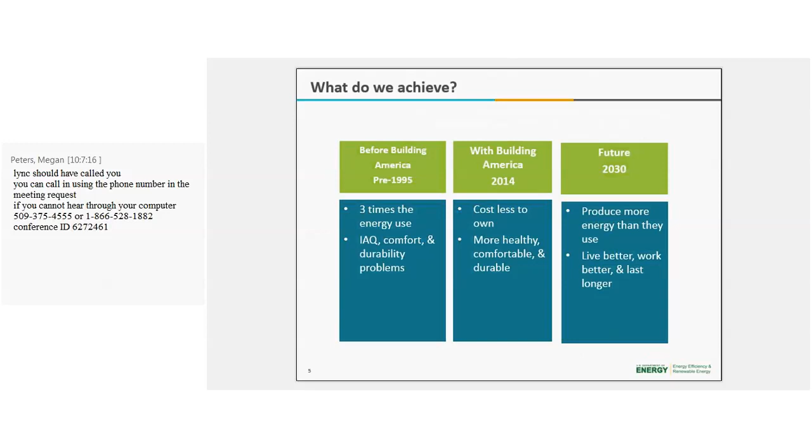So what does Building America achieve? In nearly 20 years of Building America research, we have spearheaded combining ultra-high efficiency and high performance, in both new and existing homes. We consistently are achieving these challenging tasks, and they're growing every year.

With that, we look at where we've been and where we're going. For example, in 1995, a home used about 3 times more energy per square foot compared to today, and indoor air quality, comfort, and durability problems were common back then. But today, a home built to DOE Zero Energy Ready Home specifications uses less than half that energy and is more comfortable, healthy, and durable.

By 2030, though, what do we hold for the future? Building America will demonstrate that new and existing homes can produce more energy than they use. That is the goal.

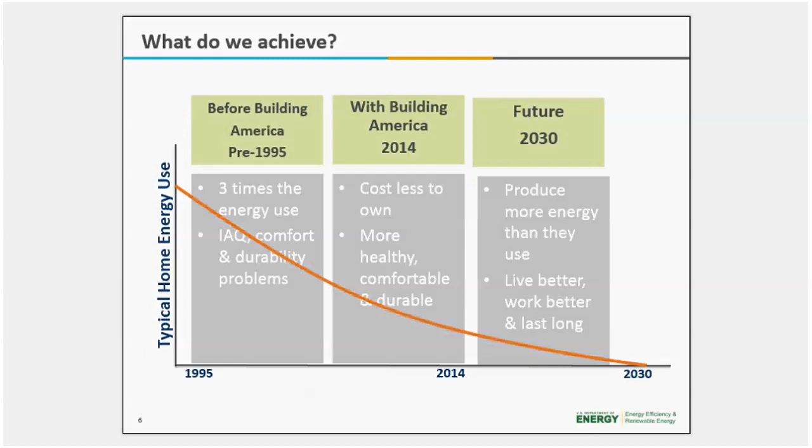So with window retrofit opportunities, it's probably not a mystery to anyone on the line that windows are a major source of heating losses. We know this, and the gains in the building can significantly drive up residential energy bills. Despite this fact, approximately 40% of U.S. homes still have single-pane windows, and these homes are inherently inefficient and poor insulators. We have several case studies that have shown this.

The presence of single-pane windows in homes has persisted over the past two decades. Despite the fact that approximately 30 million windows are replaced each year with higher-performing insulated windows, a large percentage of the double-pane windows are not higher-performing low-E windows, but are made of clear glass. So there is a tremendous opportunity here for technologies that improve existing windows' performance, such as low-E storm windows.

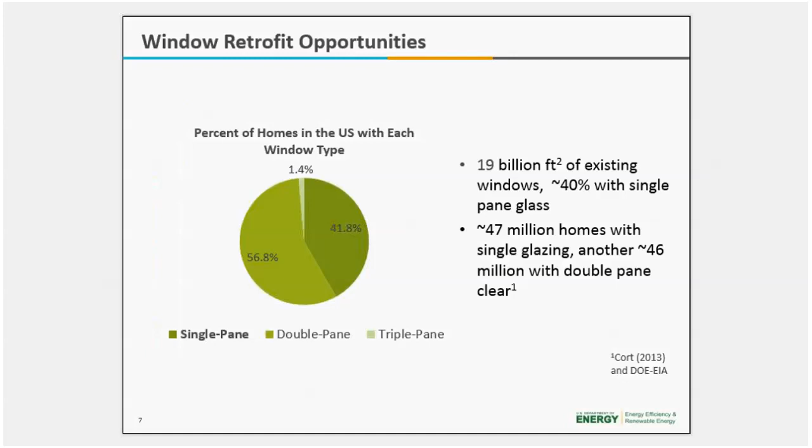These technologies can provide energy savings to a large segment of residences, most of which accommodate moderate and low-income households. So cost-effective window retrofits, that's always the big question: are they cost-effective? DOE has been supporting technology development, market assessments, and early deployment activities of low-E storm windows, which include a recent climate-based modeling effort to determine where and what types of low-E storm windows are cost-effective throughout the U.S. The results are pretty impressive.

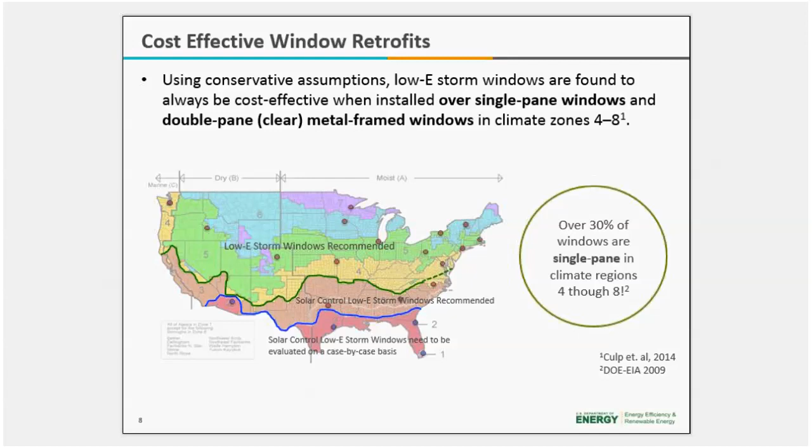So, a new look at low-E storms, inside and out. Considering the amount of energy lost through windows of existing homes each year, this is definitely a remodeling retrofit area, and there is a need for a solution. Although there are many good window replacement technologies available to homeowners, window replacement is simply not an option for many, for reasons including cost and affordability, as well as aesthetic reasons, for homeowners who want to preserve the historic look of the home.

One of the points we'd like to emphasize during this webinar is that storm windows have evolved through the years. A lot of people have an idea about what a storm window is, but these ideas may be dated, especially the look of them. Modern storm windows are not your grandmother's storm windows anymore, which had to be installed and removed every season, and cleaned almost monthly.

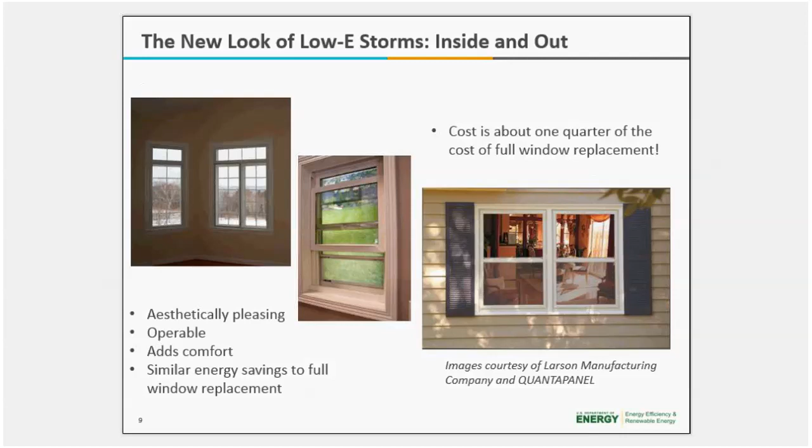Modern storm windows and interior panels are designed to blend in with the existing architecture, be permanently mounted, and are available as both fixed and operable windows. The photo on the left, the interior low-E panel, both fixed and operable, shows this. The photo on the right shows an operable exterior low-E storm, which also includes an insect screen.

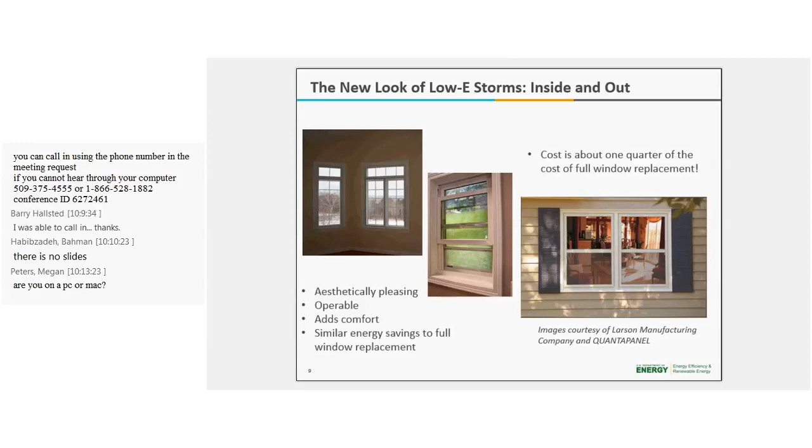Let me get into the actual presentation, and I'm going to introduce Tom Culp, who has been working with various programs in low-E storm windows for over 8 years now. He headed a DOE-funded research project from 2009 to 2013 to demonstrate, through residential and commercial case studies, the ability for low-E storm windows and retrofit panels to cost-effectively reduce energy costs in existing buildings. He's the owner of Birch Point Consulting, and he'll be providing an overview of the technology for today's webinar, how it was developed, how it works, and he'll tell us about the field tests, case studies, and other research deployment efforts related to low-E storms. So Tom, I'm going to let you take it away.

All right, thanks Pam. Hopefully you can hear me okay. So the technology in low-E storm windows has really been under development for almost 15 years now, and it initially started through the Emerging Technologies program at DOE.

DOE supported the national labs to do a lot of testing of the initial concept, starting with lab testing, going up to some demonstration field case studies, and I'll be talking about some of those areas. After this technology graduated from the Emerging Technologies program, it was passed to the Building America program for in-field testing and installation guidance development, and now multiple groups are working on market transformation to make the broader building, energy efficiency, and utility communities aware of the benefits and opportunity for this technology.

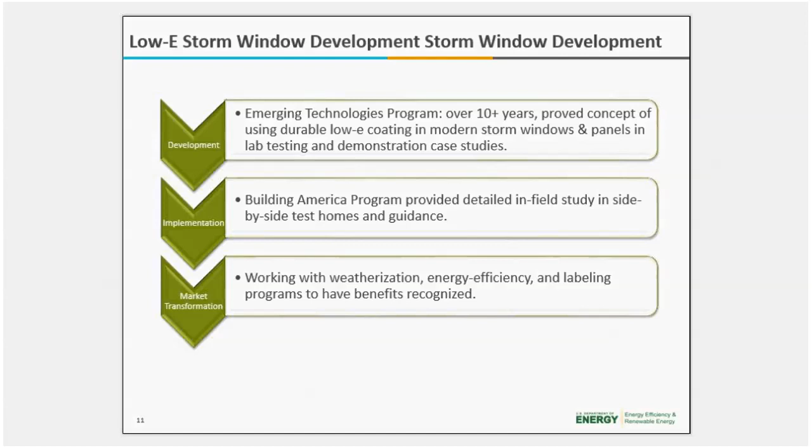But I'll start off talking about the initial concept behind low-E storm windows and some of the testing that has gone into its development.

Back in the 90s, Lawrence Berkeley National Lab, LBNL, first suggested this concept that a durable low-E glass coating, the kind you'd normally think about in a new window, could be incorporated into modern storm window designs to create a cost-effective insulating and sealing measure for existing windows. So you don't necessarily think of this as a separate window — think of it as a way, a measure, or a tool to improve your existing window.

Now, of course, if your existing window is degraded and needs replacement, you should replace it with the best window possible. But practically speaking, this is not an option for many home and building owners, either because of cost, historic preservation concerns, or because the existing window is fine and simply doesn't need to be replaced, but you still want to upgrade its performance. In that case, low-E storm windows and panels are an ideal choice to upgrade your existing windows at a much lower cost.

And it really does this in three different ways. First, it provides air sealing of the primary window. I'll talk about some case studies that show a 10% reduction in overall home air leakage when you add a storm window — not just the window itself, but the overall home — because particularly in many older existing homes, and especially with single-glazed windows, that's a primary leakage point. So addressing that area can have a significant impact.

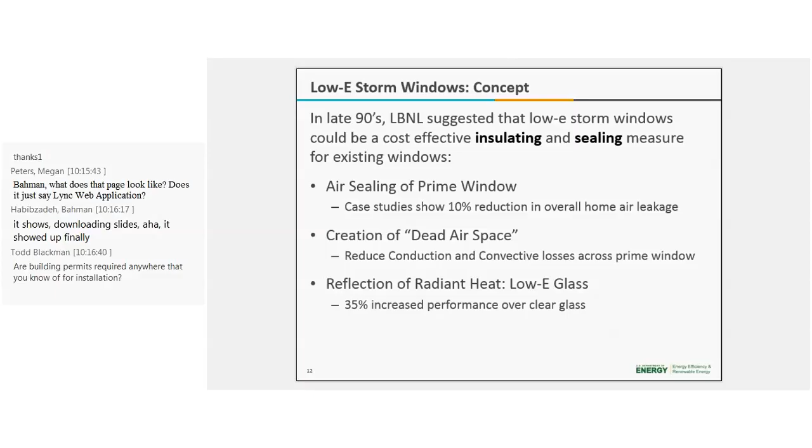Next, a low-E storm window creates a dead airspace that reduces conduction and convective heat losses across the primary window. Third, the low-E glass reflects radiant heat back into the home, reducing radiant heat loss, just as low-E glass outperforms regular glass in a new window.

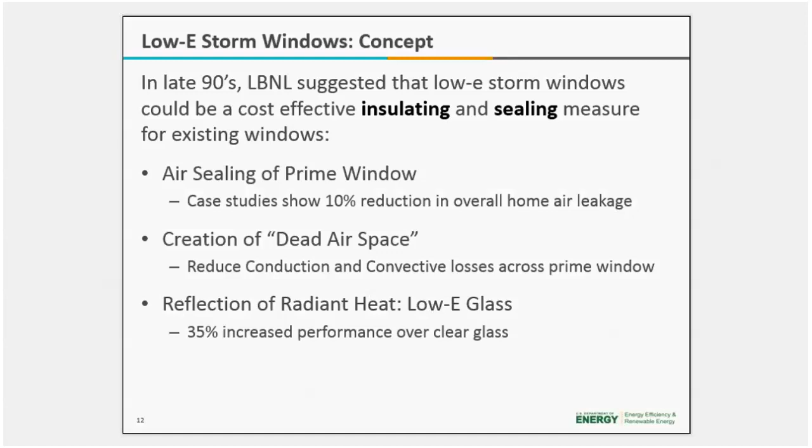The best way to see this concept is visually, through infrared field images. This particular image was taken in the wintertime from the outside of a home. Light colors show heat loss and dark colors show where it's more insulating. In the center you can see the bright, original single-pane window with considerable heat loss. On either side there are operable windows retrofitted with Low-E storm windows, and you can see side by side how the Low-E storm window significantly reduces the heat loss through that window.

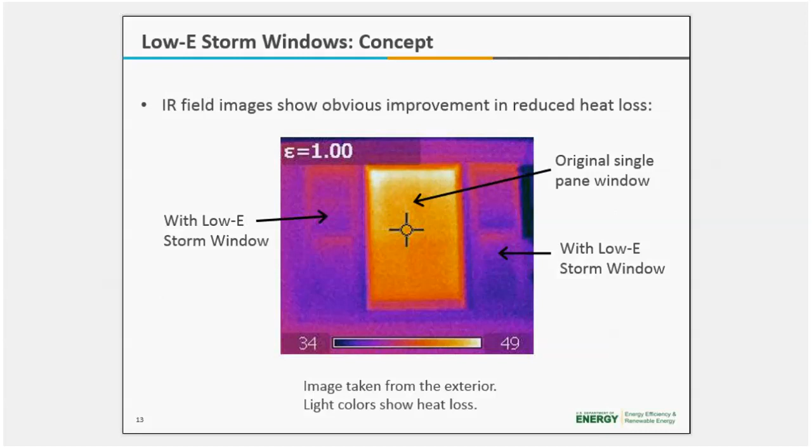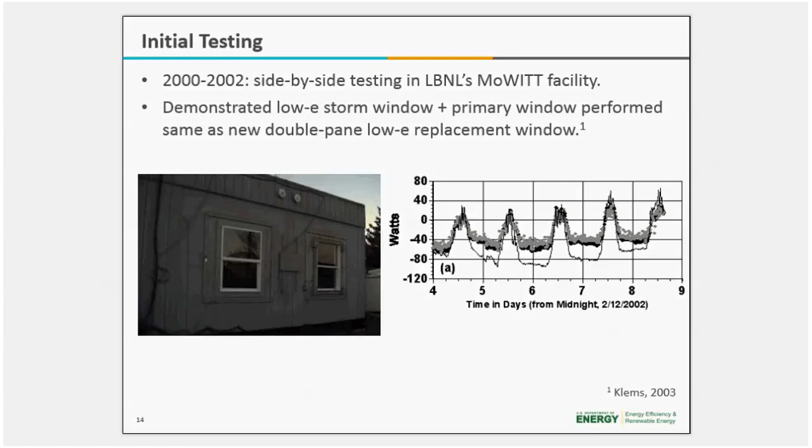To test the concepts, going through a bit of history: first, between 2000 and 2002, Lawrence Berkeley National Lab used their mobile window test facility, or MOWITT facility, to do side-by-side detailed testing of different window options. There's a lot more in this study from Joe Klems that you can look up, but basically they demonstrated that a Low-E storm window plus a single-pane primary window performed essentially the same as a new double-pane Low-E replacement window.

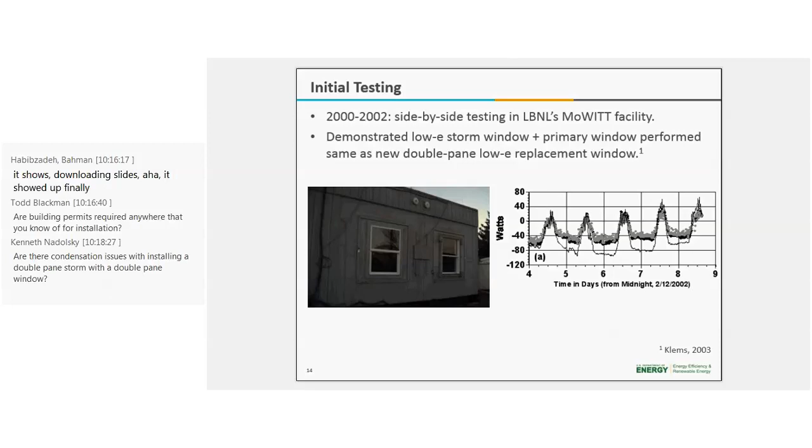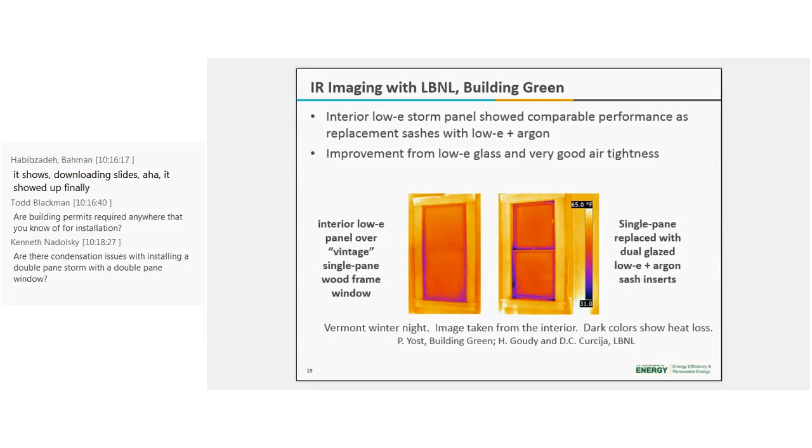Additionally, a bit later on, LBNL did some work with Building Green, Peter Yost's group up in Vermont, doing infrared imaging. This slide shows, on a Vermont winter night, an image taken from the interior. In this case the dark colors show heat loss and the bright colors show more insulating performance. On the left you can see an interior Low-E panel over a vintage single-pane wood frame window, and on the right the single-pane sashes were replaced with dual-glazed Low-E argon sash inserts. Visually, you can see they perform similarly in terms of heat loss.

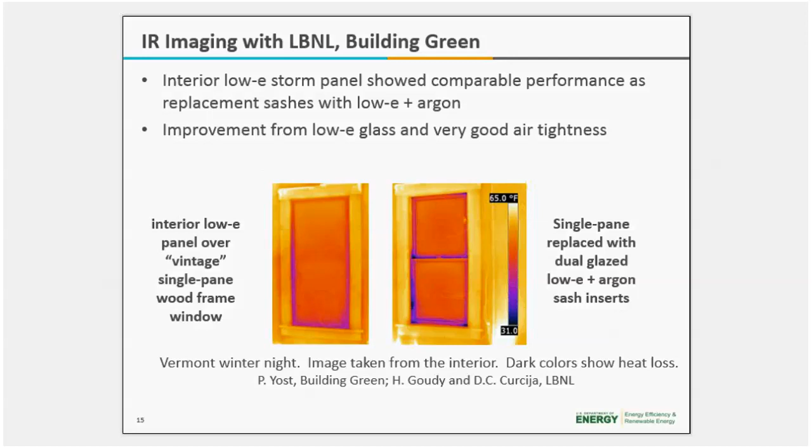So the concept, both in lab testing, looks quite positive — we can get significant improvement in performance by using both interior and exterior panels.

DOE wanted to take the next step and see how this works in the real world through field studies. So between 2003 and 2006, a field study was done in the Chicago area, co-funded by DOE and HUD, with the primary researcher being NAHB Research Center — now called Home Innovation Research Labs. They monitored six weatherization homes in the Chicago area that had single glazing and were retrofitted with Low-E exterior storm windows. This study showed the heating load was reduced by 21%, with a simple payback period of approximately 4.5 years for the Low-E storm windows.

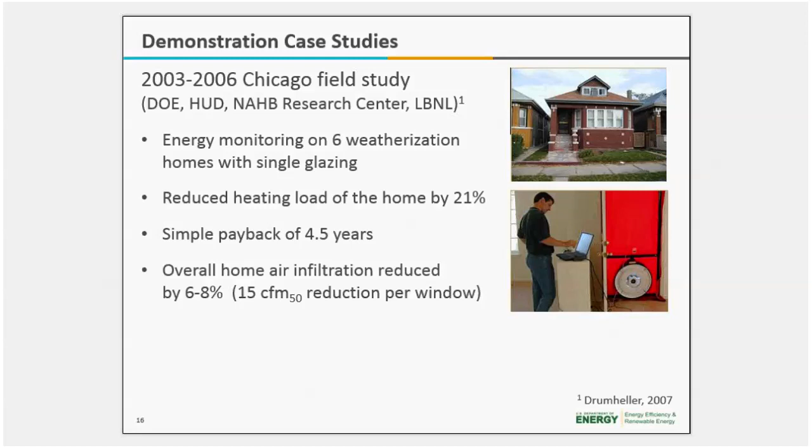Of course, for replacement windows, the payback period is considerably longer than that. Additionally, blower door tests showed the overall home air leakage was reduced by about 7%. That's for the overall home, not just the window, so that's actually fairly significant.

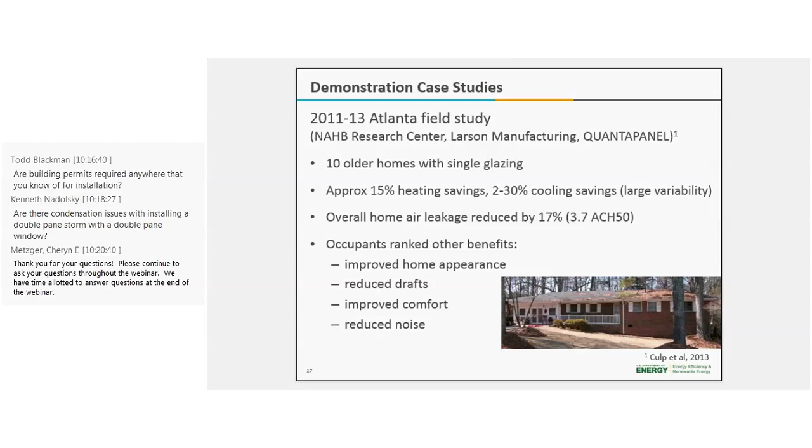Chicago is obviously a very cold climate, so we wanted to do a similar study in a more mixed climate. I participated in a DOE-funded study between 2011 and 2013, again with the NAHB Research Center, as well as Larson Manufacturing and QUANTAPANEL, where we took 10 older homes in the Atlanta area with single glazing and tested different storm window technologies. The Low-E storm windows showed, over a two-year period, approximately 15% heating savings and 2 to 30% cooling savings. There's large variability, particularly on the cooling side, because these are real-life field studies with variation between homes, the amount of trees around them, and real people living in them. These are occupied homes, so there's a lot of variability, but the results were very positive overall, both on heating and cooling.

A bit later on, Sarah Widder from PNNL will talk about test studies done in the PNNL test homes, which are a more controlled environment.

On the air leakage standpoint, these homes and their single-pane windows were particularly leaky, so by adding the storm windows we were able to reduce the overall home air leakage by 17% just by introducing these modern-style Low-E storm windows. In addition to energy efficiency, we also polled occupants on other benefits, and they actually ranked these higher than energy efficiency, because they're what you notice when you live in the home. The number one benefit cited was improved home appearance.

As Pam was saying, these are not your grandmother's old storm windows that have to be taken off seasonally, old and clunky. These are designed to be aesthetically pleasing, fit in with the architecture, and improve the curb appeal, dressing up these old existing windows. Additionally, reduced drafts, improved comfort sitting near the windows, and reduced noise were significant benefits cited by the occupants.

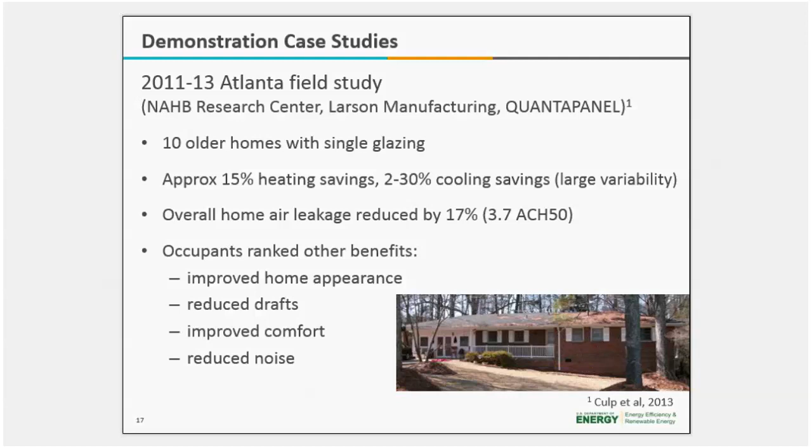In addition to single-family homes, we also wanted to test out low-E storm windows in multifamily buildings. As part of this same research study with NAHB Research Center, Quantapanel, and Larson Manufacturing, we took two older, 50-year-old large apartment buildings in the Philadelphia area. Just one of the two buildings is shown here. They're both identical, 101 apartments overall.

These had single-pane metal windows that already had old clear storm windows. But the old clear storm windows were really poor quality, so we replaced them with new modern low-E storm windows. Just by replacing those, we saw over a year period 18 to 22% reduced heating energy use, as well as 9% reduced cooling energy use, so very significant.

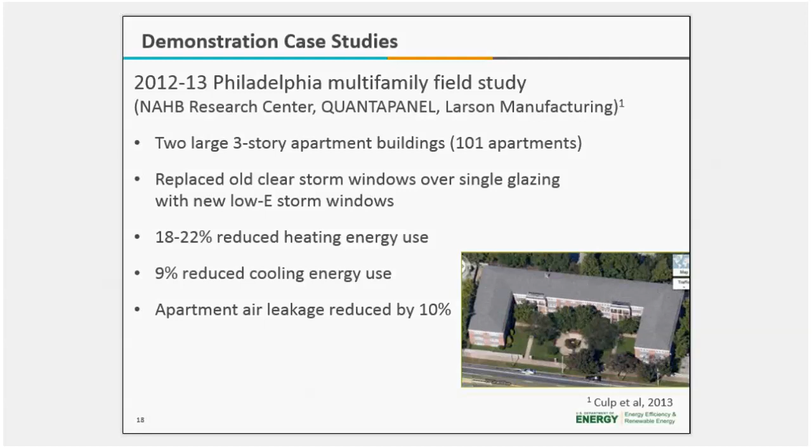We also did air leakage testing on select apartments and showed that the apartment air leakage was reduced by 10%, which is consistent with the other studies. So very positive results in both single-family homes and apartment buildings.

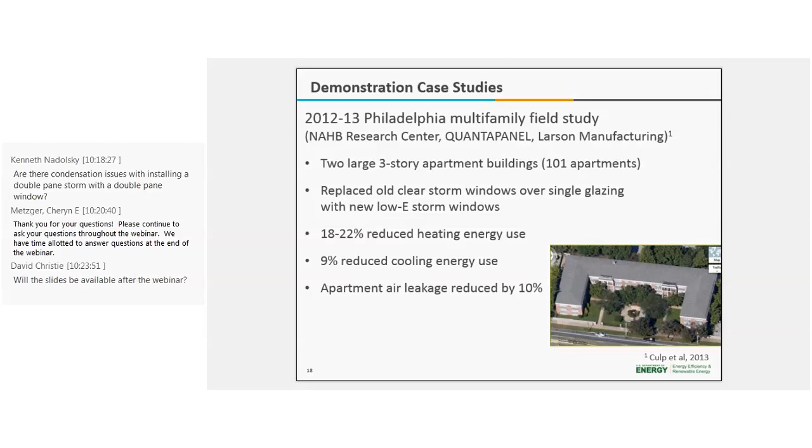I did want to mention, though, that low-E storm windows and panels are not just for low-income weatherization homes. Obviously, that's one of the first targets, but they're really appropriate and a good window retrofit option in almost any building type where it's either impractical or too expensive or undesirable to replace the existing windows. Of course, if you're going to replace the windows, put in as good of a window as you can, but in many cases it's just not practical or cost-effective to do so. In that case, low-E storm windows are a very good option.

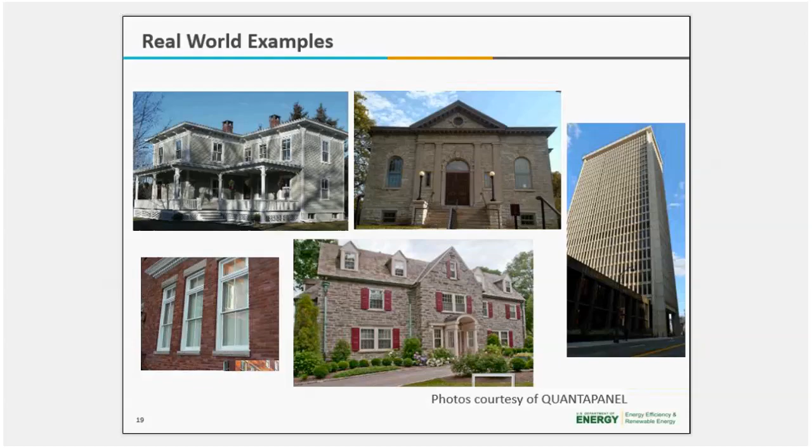As shown here on this slide, this includes homes of all types, historic buildings, light commercial buildings, and even large buildings. All the pictures here show real-life examples where either low-E exterior or low-E interior panels are being used.

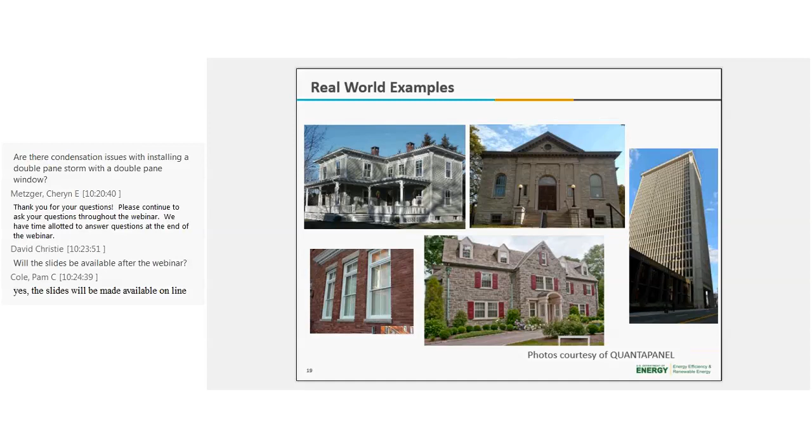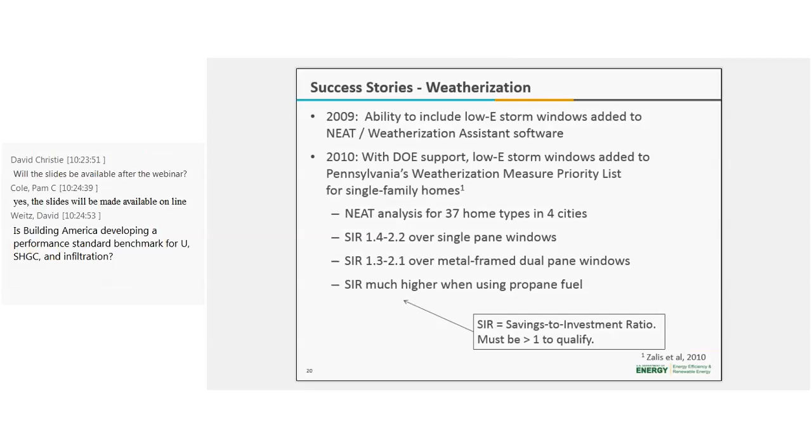Although they're really applicable to almost any building type, of course one of the first targets when we started to look at this is weatherization, both official government weatherization programs, but also the general weatherization market for upgrading existing homes. So back in 2009, the ability to include low-E storm windows was added to NEAT, the National Energy Audit Tool, a weatherization assistance software used by many state weatherization programs.

The following year, with DOE support, low-E storm windows were added to Pennsylvania's weatherization measure priority list for single-family homes. This was the result of a NEAT analysis for 37 home types, covering all different home types in 4 different cities across Pennsylvania to cover the different subclimate zones.

In this case, the key output we're looking at is the SIR, or savings to investment ratio. Under weatherization programs, the SIR must be greater than 1 to qualify for that program. When we did the NEAT analysis, the SIR was between 1.4 to 2.2 for low-E storm windows over single-pane windows, and it ranged from 1.3 to 2.1 over metal frame dual pane windows.

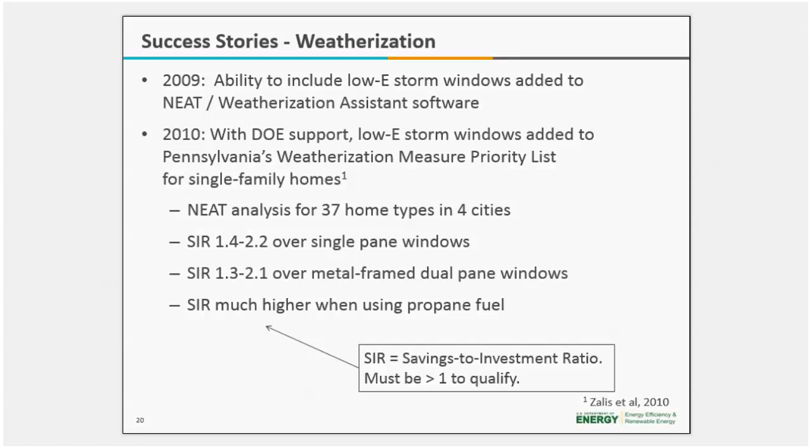The main study was done for natural gas heated homes, but when you use either propane fuel or electrical resistance heating, the SIR was much higher than this even. So in all cases, it was proven to be cost effective for the weatherization program in Pennsylvania, and they added it to their weatherization measure priority list.

So we wanted to, together with PNNL, expand upon what was done in Pennsylvania, to do a similar type analysis but for the entire country. We expanded this NEAT analysis using 39 different home types in 22 cities across all 8 climate zones that cover the continental U.S. There's a lot that went into this study.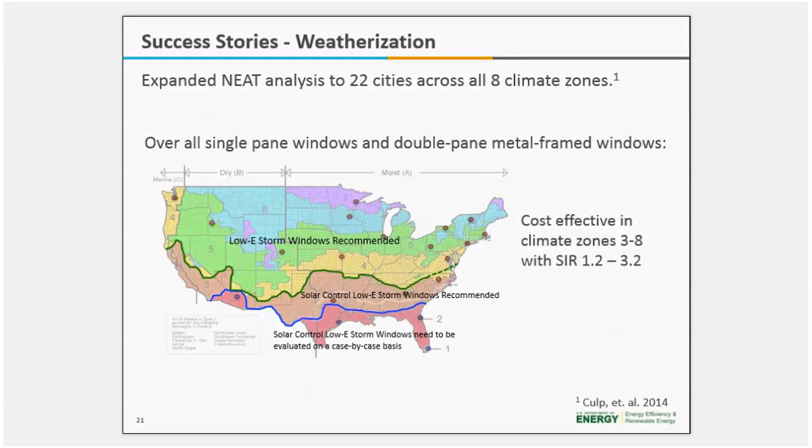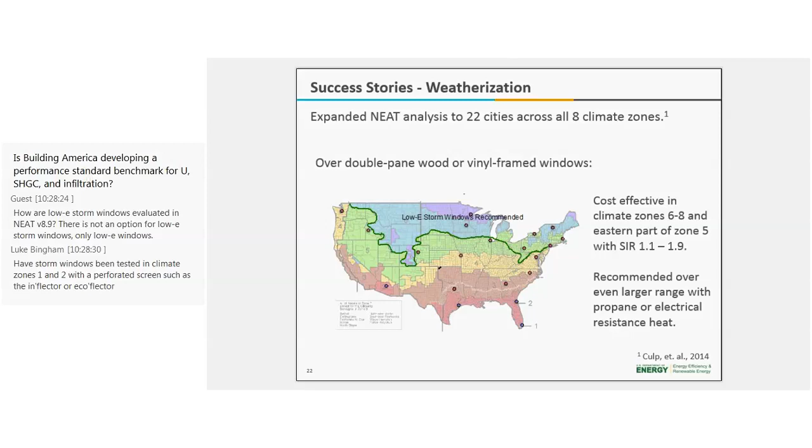We also tested double pane wood or vinyl frame windows, where adding a low-E storm window or panel would turn it into a triple low-E unit. This was shown to be cost effective in climate zones 6 through 8, as well as the eastern part of zone 5, which has higher heating fuel costs, such as Pennsylvania and New York. In this case, the savings to investment ratio, or SIR, ranged from 1.1 to 1.9. This was for natural gas heating; with propane or electrical resistance heating, they're recommended over a much larger range because those are higher cost fuels.

Taking these positive results from field studies and climate-based modeling, one group we're working with now is the Consortium for Energy Efficiency, or CEE, which includes utilities and energy efficiency program administrators. They've formed a Windows working group between CEE members and industry stakeholders to advance the uptake of efficient fenestration products across the U.S. and Canada, including efficient new and replacement windows as well as window attachments such as low-E storm windows. One of the first outcomes was the CEE window product overviews published in February, a resource for CEE members and program managers detailing options and technologies for addressing windows in utility or energy saving programs.

There are currently a couple of working groups, including a Windows attachment subgroup covering low-E storm windows. Our next meeting will be in Salt Lake City as part of their industry partnership meetings, September 17th and 18th.

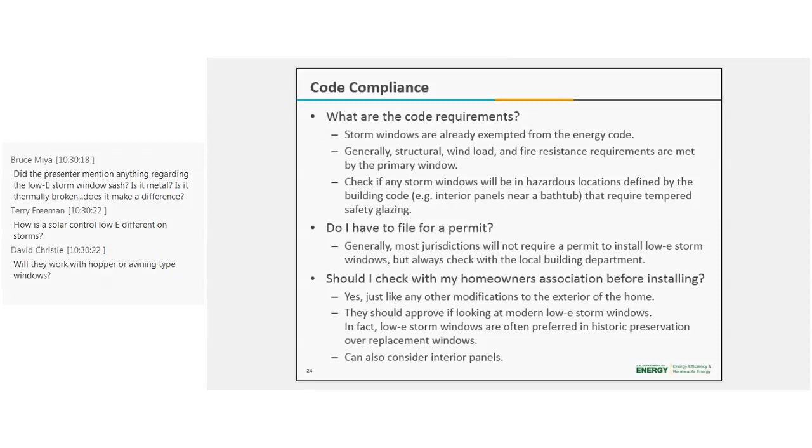We wanted to add a slide about code compliance and questions we get about how code requirements apply to low-E storm windows and panels. For the energy code, storm windows are already specifically exempted because you're improving the energy performance of what's already there, and the code recognizes that. As for other building code requirements, such as structural, wind load, and fire resistance requirements, those are generally met by the primary window and building facade, so it's generally not a concern as long as the storm window or panel isn't adversely impacting that performance.

The main thing to watch for when using low-E storm windows or panels is whether they'll be used in a hazardous location as defined by the building code—for instance, an interior panel installed near a bathtub or swimming pool. Those scenarios require tempered safety glazing, which is easily done; you just need to specify tempered glass for that application.

The next question we get a lot is whether you need to file for a permit. That comes down to the local jurisdiction. Our experience is that installing these panels and storm windows can be a do-it-yourself project for a homeowner, or you can have a contractor do it. Because of that, most jurisdictions generally do not require a permit to install low-E storm windows, but you always need to check with your local building department—it's really a local issue you need to check.

A third question is whether you should check with your homeowners association before installing low-E storm windows, and the answer is yes. Just like any other modification to the exterior of the home, whether installing a mailbox or painting your house, you need to check if your neighborhood or HOA has any covenants. In general, they should approve it since modern low-E storm windows are very aesthetically pleasing and designed to fit the architecture of the building. In fact, they're often preferred in historic preservation programs for preserving appearance. But if it is a concern, you can also consider interior low-E panels.

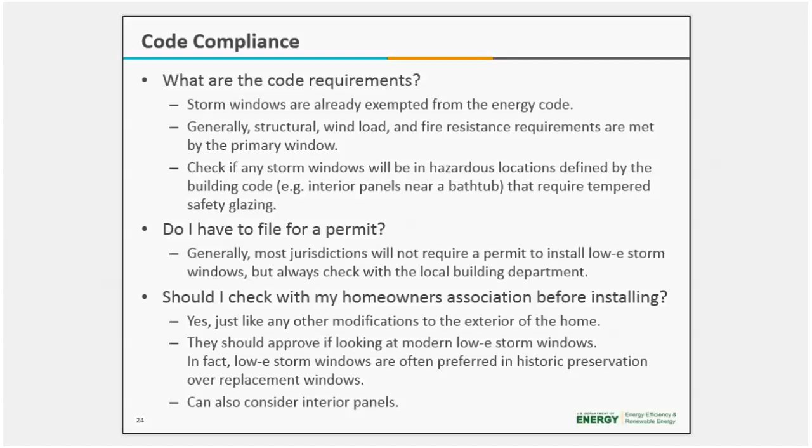So a couple of last items looking to the future before I hand it off to Sarah. Some of the other activities going forward.

Recently, low-e storm windows were integrated into the FEDS model, which then supports their use in most federal building energy audits. DOE is supporting the development of a new organization and certification and rating program for window attachments, and that work will cover a wide range of products, including storm windows.

As I mentioned, we're working with CEE to develop tools and resources for energy efficiency incentive programs, and we're also working directly with utility and weatherization programs to provide technical assistance.

Contact Katherine Cort, who's kind of the lead on this for PNNL, or you can contact myself and Sarah Widder, and there are other people on the call. I know Carrie Haglund has been working with a group up in Minnesota, also called CEE, but a different group. There's a lot of work out there.

Contact one of us for a lot more details. So next, I'll hand it over to Sarah Widder.

Sarah is an engineer at Pacific Northwest National Laboratory, and she's an expert who has worked in a wide range of areas related to energy efficiency of homes and buildings — not just windows, but all components of housing and the Building America program. In particular, she's an expert on the side-by-side test homes at PNNL, and today she'll be talking about some of the results there with low-e storm windows.

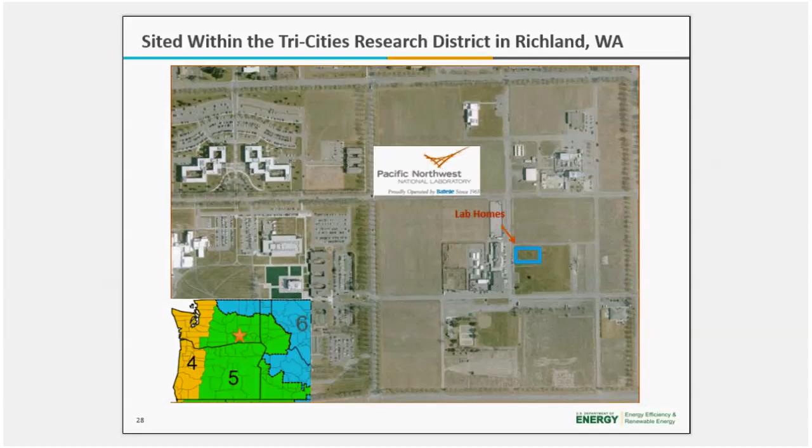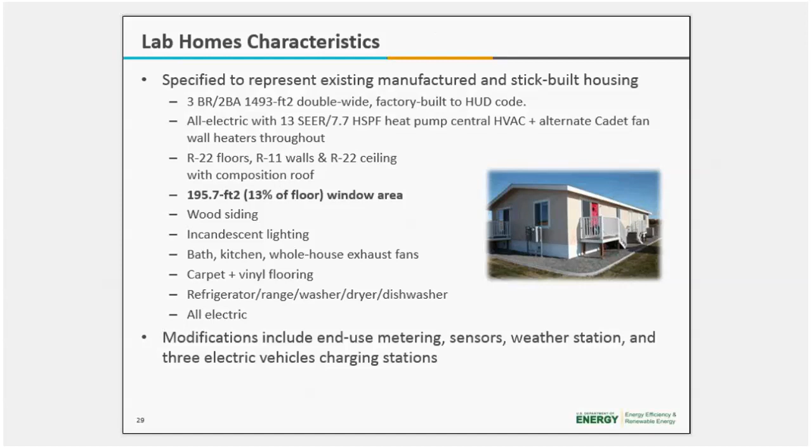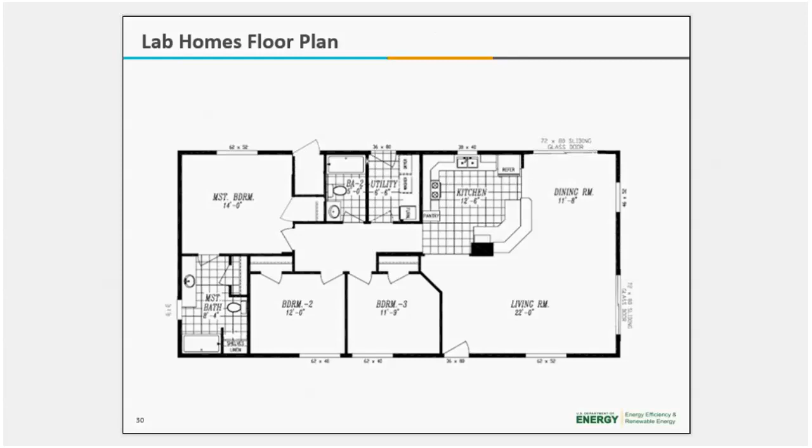These homes are also highly monitored and controlled, and that's what gives us such a precise measurement at the end of these experiments that we do.

We have commercial lighting panels as the circuit panels in the homes, so we have 42 individually monitored breakers, so we can measure uniquely almost every load in the home. And half of them are controllable, which is how we simulate occupancy in the home. We turn on and off lighting, we turn on and off some of the appliances, and generate sensible loads within the home that are representative of people and equipment, so that we have identical occupancy patterns that are representative of a typical occupant in both the homes.

And I know that there's a lot of variability in occupancy patterns, and we could have an entire webinar about that, but the really nice thing about the way the homes are laid out is as long as we do it identically in both the homes, it sort of becomes a null factor. So it's not as important that we get the occupancy itself exactly correct, as long as it's identical in both the homes.

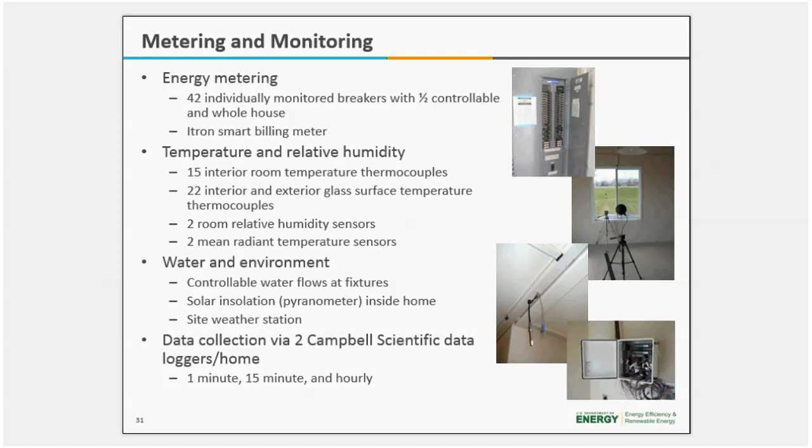And then we also have interior and exterior surface glass temperature measurements so we can look at conduction through the glass. We take all our data with Campbell Scientific Data Loggers. We typically do our analysis with the 1-minute data, but we collect it on a couple different intervals.

So I've talked a little bit about how the lab homes are unique. The main thing that makes this platform unique is that it has a built-in control. So we have one home that has baseline windows — in this case, we'll talk about that later — a clear glass, aluminum frame, double pane windows, and then another home that is identical in every way except for the one technology we're trying to evaluate. That allows us to precisely look at the impacts associated with that technology, and gets us a lot more causal answer than you can get in field studies.

But that's dependent on how identical the homes are. We're assuming that these homes are operating the same. And so when the homes were first sited, we did an initial building construction comparison to verify similar performance, and the homes operated pretty much as similar as you could expect, and actually a lot more similar than you would get with site-built, stick-built housing, because they were manufactured homes.

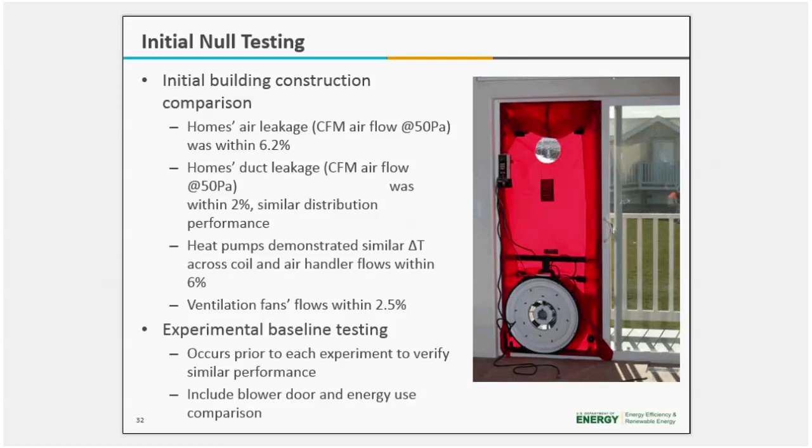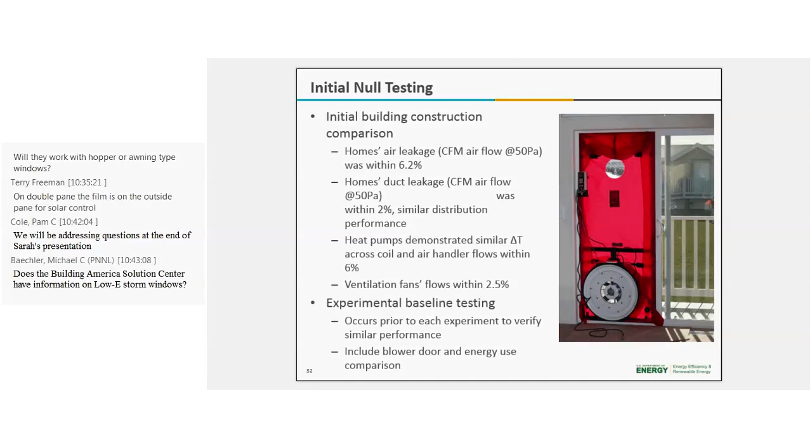And then before each experiment, we also do an active baseline, or a null test, where before the technology is retrofit, we operate both homes for about a week with full occupancy and HVAC control, just to ensure similar energy performance before we do the retrofit. And then anything we see that varies from that baseline performance, we can attribute to the retrofitted technology.

So let's get into the experiment now. Here's a description of the window characteristics.

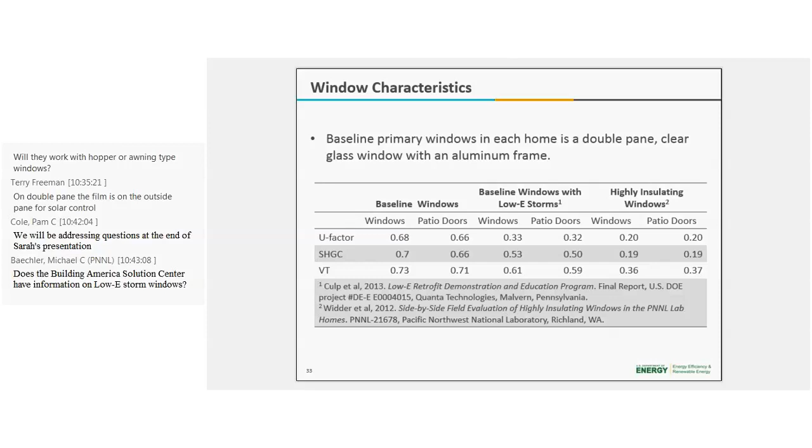The baseline windows I described were a double pane clear glass window with aluminum frame, which we have a lot of in the Pacific Northwest region for these unretrofit 60s, 70s era ranch homes.

You can see the U factor, which is a measure of thermal resistance, the solar heat gain coefficient, which is a measure of how much solar heat will come through the window and get into the house, which is beneficial in the heating season, not so great in the cooling season. And then the visible transmittance, VT, is how easy it is to see through the glass.

So you can see we had a significant reduction in U factor and solar heat gain coefficient with the low E storm windows. I'll mention that these numbers for the low E storm windows, 0.33 and 0.53, and the patio doors as well, were generated via modeling done by a company using LBNL's Window Therm model. They are created in accordance with NFRC testing techniques, but there's not official NFRC certified ratings available for low E storm windows right now, which is one of the barriers to really getting these technologies incentivized in the market - we don't have a clear way to describe their performance in comparison to other window fenestration products.

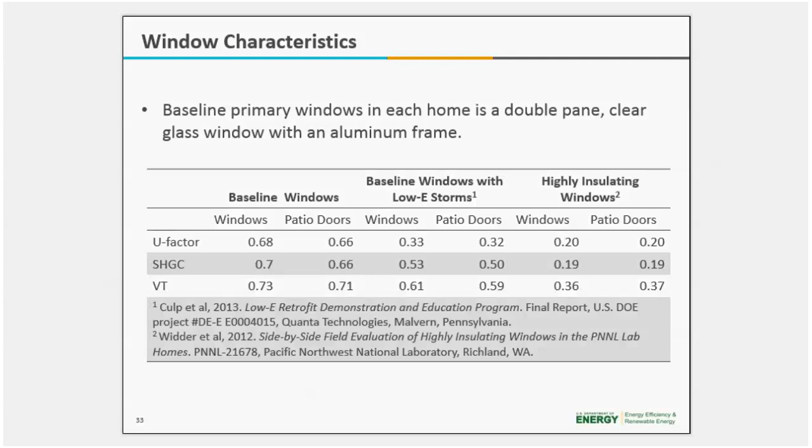So I'm not going to spend that much time on this slide. Tom covered in great detail how low E storm windows save energy. This is just 3 visual depictions of it. Just like a double pane window, they're creating an additional dead air gap that will decrease conduction. It'll also reflect heat back into the space and can decrease air leakage.

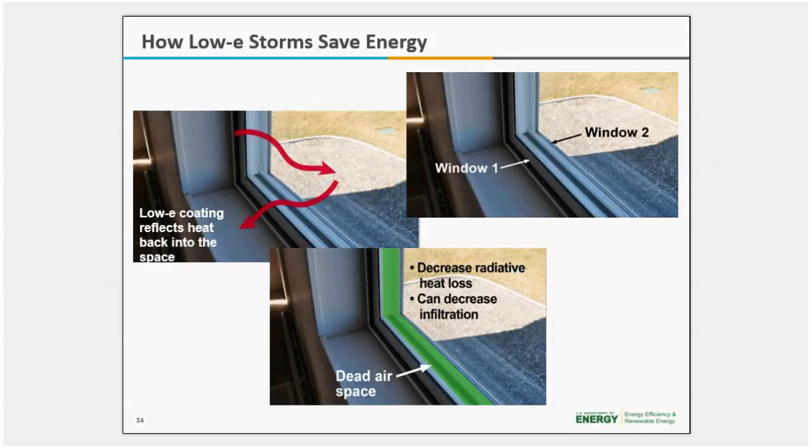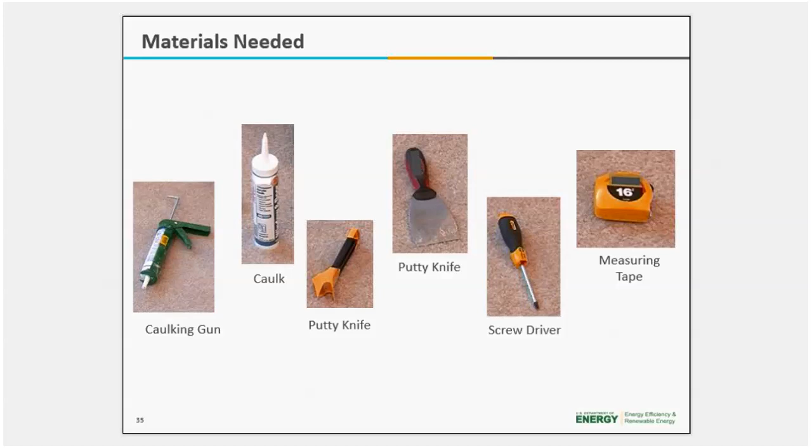I am going to spend a little bit of time on how low E storm windows are installed. They're very easy to install. These are all the tools that are needed, so any homeowner who's handy with a screwdriver and a measuring tape can do it. Window contractors or even general contractors can also easily install them. This isn't a complicated technology to install - you just need caulk and a caulking gun, something to clean up the caulk. A screwdriver or screw gun will make this even easier, and measuring tape is probably the most important piece.

The first step to specifying and installing storm windows is measuring your existing window opening. This is really probably the most important step to make sure your windows will fit properly over your existing primary window. This is applicable for both interior and exterior low E storm windows.

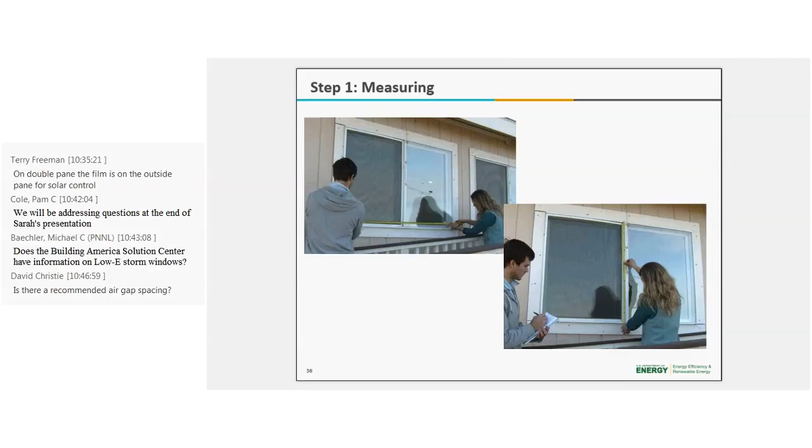Exterior low E storm windows can be installed in two different configurations, either an overlap installation, which is what we did in the lab homes and we'll see some pictures of later, or a blind stop configuration where it fits into the window opening. Manufacturers typically have specific instructions for the dimensions they're looking for, so follow manufacturer instructions. Windows can be custom ordered from window distributors or some big box retailers, and there's also some common sizes available that you can purchase off the shelf.

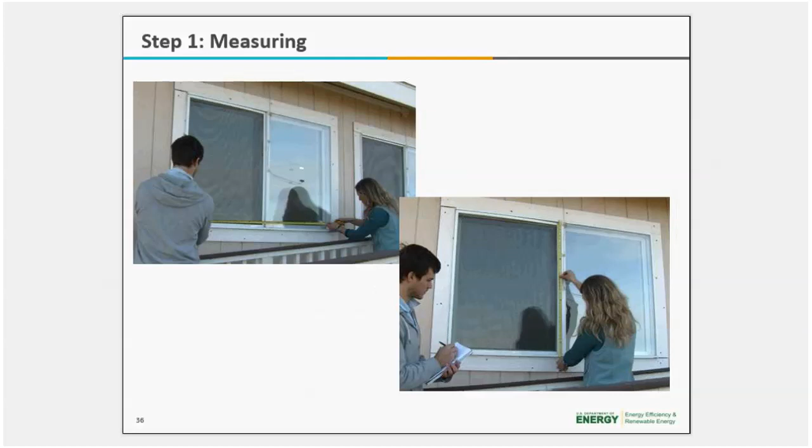So measure, measure, measure. Typically for a slider or any horizontal window opening, you'll want to measure the top, the middle, and the bottom, and then use the smallest measurement so that your window will fit into the window opening.

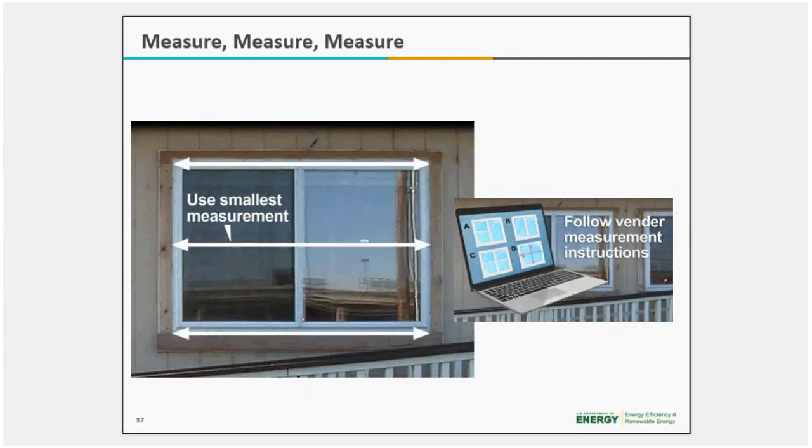For an external installation, this is the blind stop installation type. You first want to dry fit the window, so hold the exterior window up to the window opening and make sure the screw holes are all landing on solid wood. You want to make sure that the storm window and the primary window both open in the same direction - that'll make it easier to use and increase the permanence of the installation.

Then just take the window down, caulk around the opening, put the window back in place, and then screw in. You only want to caulk along the top and sides of the window opening - don't caulk the bottom. Exterior storm windows have weep holes designed into the bottom, with a little plastic gasket on the bottom to help make sure that bottom edge is as airtight as we need it. But those weep holes will help with drainage if any condensation should occur between the primary window and the exterior window.

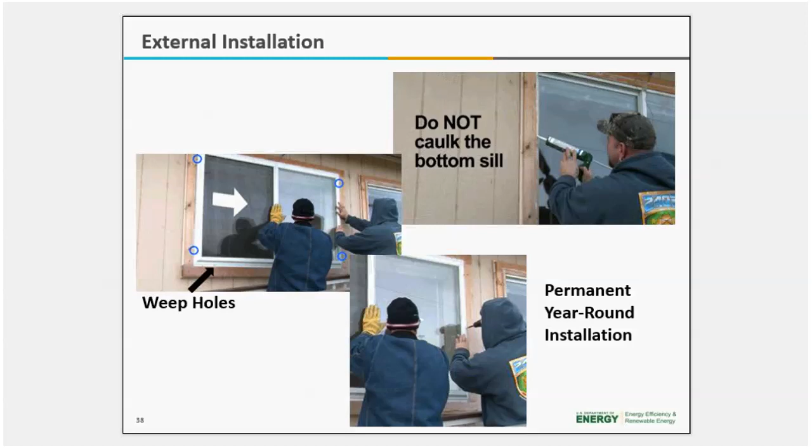For an interior installation, the process is very similar. Interior windows are only available in the blind stop installation type, so you'll typically have a trim piece that goes between the primary window and the interior low-E storm window to make sure you have a good thermal break between the two windows and a sufficient gap. You can see in the upper right-hand corner the screw holes that will be in the low-E storm window frame for an interior window in a blind stop installation.

You can see the contractor installing it in the lower left window. You also want to make sure your low-E coating is facing the right side for both interior and exterior installations. And you can do that.

Sometimes the manufacturers will put stickers on them, but they also feel different, so you can rub both sides of the window. The side with the low-E coating is a pyrolytic coating and it feels squeaky. If you run your fingers on it, it'll squeak, and it just has higher friction to it.

The low-E storm windows don't have weep holes, so you want to caulk around the whole opening, because they're meant to be the primary air barrier. So if condensation, particularly from inside generated moisture, is a concern, an interior low-E storm window might be something to consider.

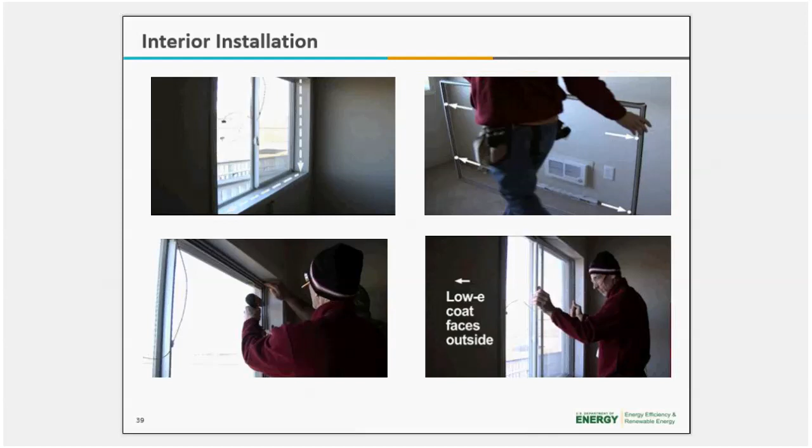So the results from our Lab Homes experiment: we saw an average of 10% whole house energy savings from the low-E storm windows, compared to 12% from the R5 triple pane windows. That's really significant savings from a pretty cost-effective technology.

I've shown just the average daily energy savings here. Those are extrapolated from our seasonal measurements using a heating degree day extrapolation. We've also generated some energy models to corroborate those numbers using Energy Plus, but these are just the heating degree day regressions.

You can see for the low-E storm windows, we saw better savings during the heating season, the winter, than the summer. That was the opposite in the highly insulating window experiment - we saw better savings in the summer because of the low solar heat gain coefficient.

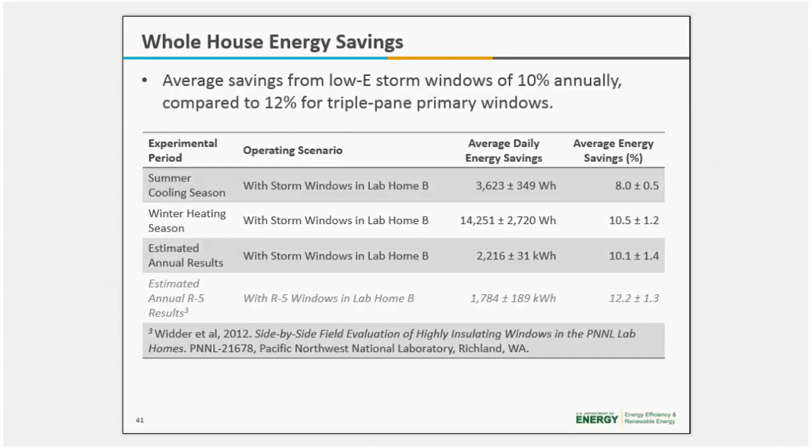We also measured the air leakage performance of the low-E storm windows, and we did some sensitivity blower door testing, which is what's shown in the table, to try to figure out which window was our primary air barrier for the Lab Homes experiment. For us, the primary windows in manufactured housing in general have a reputation for being pretty airtight, because there's a lot better quality assurance that can be done on a manufacturing floor than out in the field when you're building a stick-built house. So these primary windows, in a new manufactured house, they were pretty tight, and they were our primary air barrier.

So those energy savings numbers we saw before, 10%, could probably be improved, since those are really just from the improved thermal performance of the low-E storm windows. We're not really getting a lot of benefit from decreased air leakage in our experiment, which probably wouldn't be the case in the field.

This table, I'll spend a little bit of time describing it. Lab Home A, that first line that's italicized, is just showing the comparison for a baseline - that's our unmodified home - so we're just showing how similar Lab Home A and Lab Home B are. You can compare that first line to the second line, where both

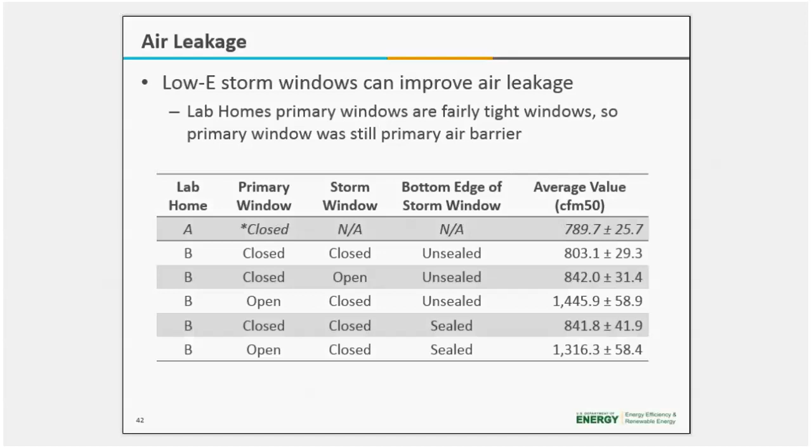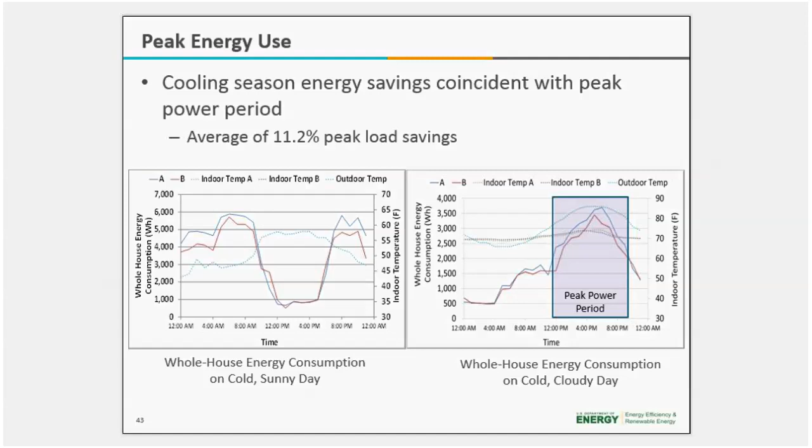It's not that replacing your windows is a bad idea, but people replace windows for a lot of reasons that are typically not tied to payback or energy savings—for health and safety reasons, a lot of times for aesthetics or improvement of home value. Sometimes people do it for comfort reasons, but it's typically not driven by an energy or cost effectiveness calculation.

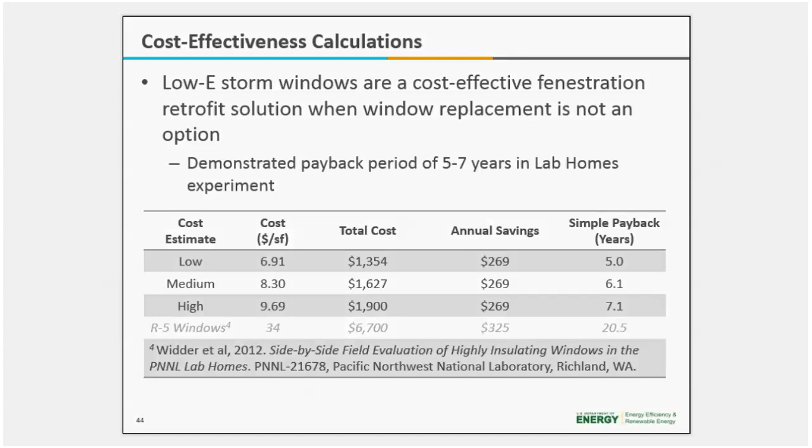And with that, I think we've been presenting for about an hour here. I don't know how many questions we have, but I think I'm going to turn it back over to Pam, and we can maybe field some questions if there are any. So thank you all for your time and attention.